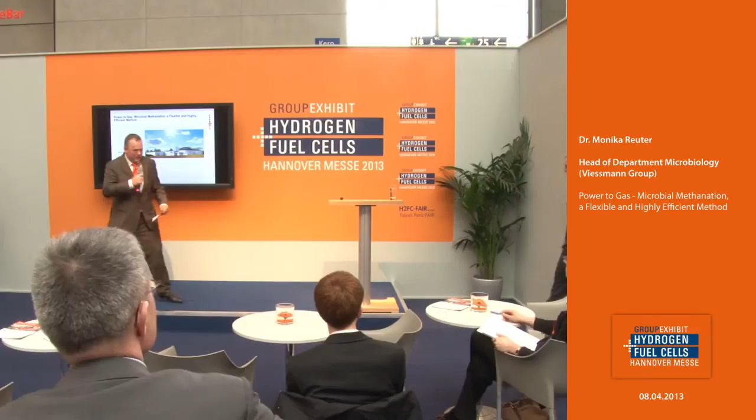Thank you very much for the kind introduction. Ladies and gentlemen, I'm very glad to give you some words on microbial methanation.

I want to structure my lecture in 5 topics. First of all, I want to introduce the Viessmann Group and MicrobEnergy, which is a subsidiary institute of Viessmann. A few words about biological methanization, the potentials, the development works and our results, what we have in the lab, and a few words about the economics.

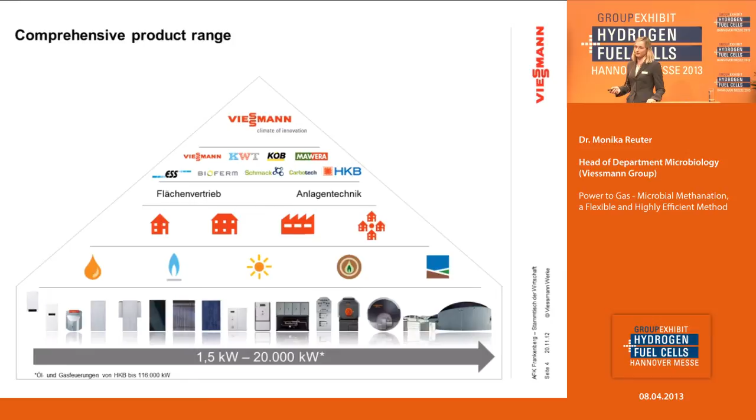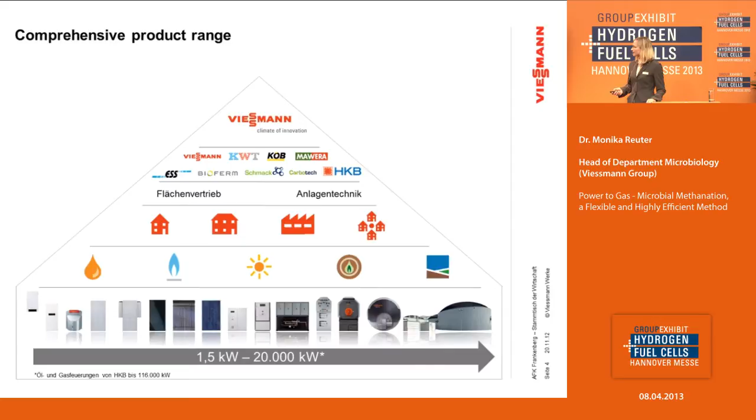MicrobEnergy is a spin-off company of Schmack Biogas. Formerly we were the R&D department of Schmack Biogas, and since 2012 we are now our own company. We have 16 people in Schwandorf. One portion of our work is dealing with optimizing the biogas process, and on the other hand is the power to gas process. So probably you know the biogas process.

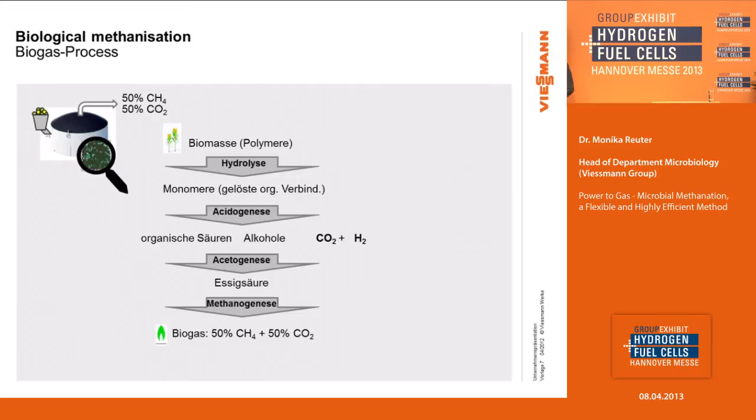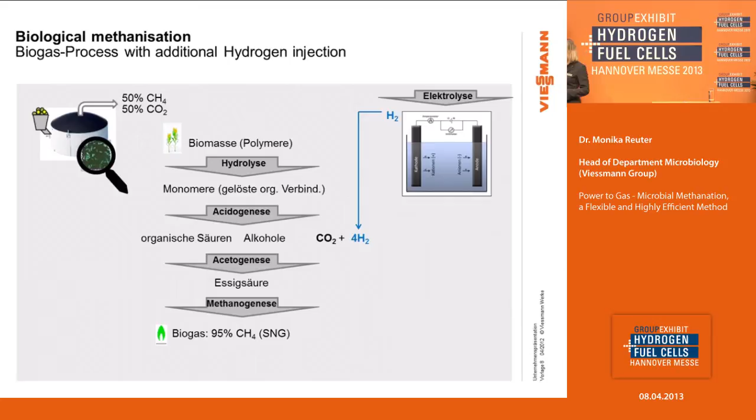It's divided in 4 steps: hydrolysis, acidogenesis, acetogenesis, and methanogenesis, so that's the normal process in the bioreactor. And we can see that we already have this process that we go from CO2 and H2 to methane. The biogas normally consists, when you use renewable energy crops, of 50% CH4 and 50% CO2. So the plan is to bring extra hydrogen into the biogas process and bring it up to the stoichiometric volume so that we have additional hydrogen to produce more CH4.

So the methanogenesis is a very old and simple process. The bacteria, or let's say archaea, it's not bacteria, it's a process which is very stable and very easy to control. So the bacteria depend on the hydrogen and the CO2, and if they have the gases, they do the work, and if they don't have the gases, they can't work, they sleep more or less. And we have an efficiency factor of about 80%, that's the conversion rate we have in the chemical process.

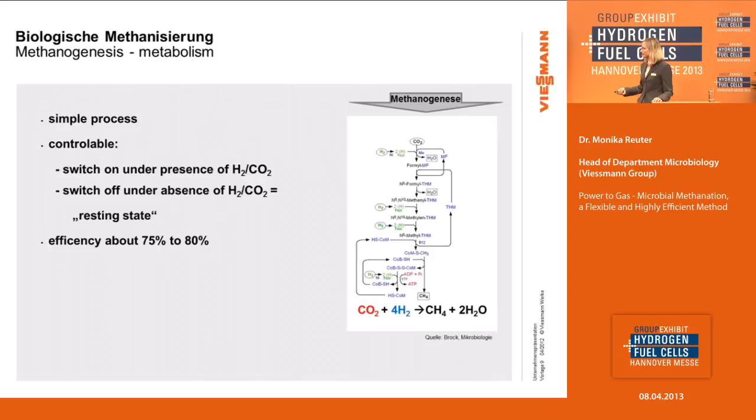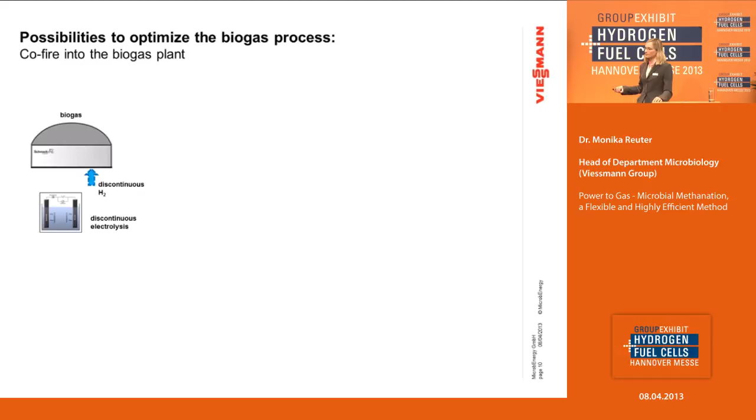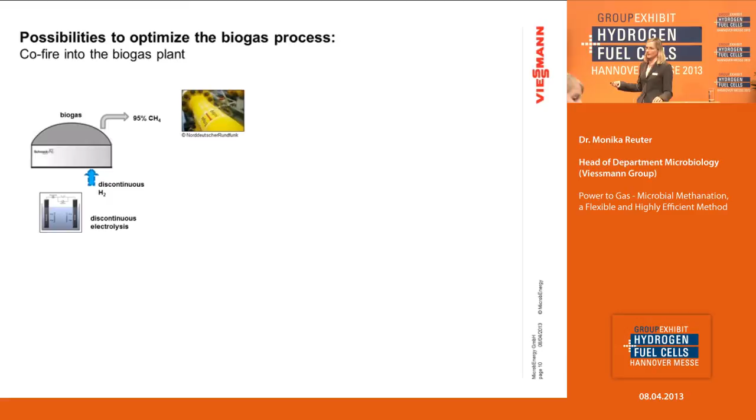Possibilities to optimize the biogas process: we have several opportunities where we can put the hydrogen into the process. It can be done into the process directly, either discontinuously. Then we can produce more or less methane, or SNG, which is possible to be put into the grid. So we can use the gas grid as an energetic reservoir.

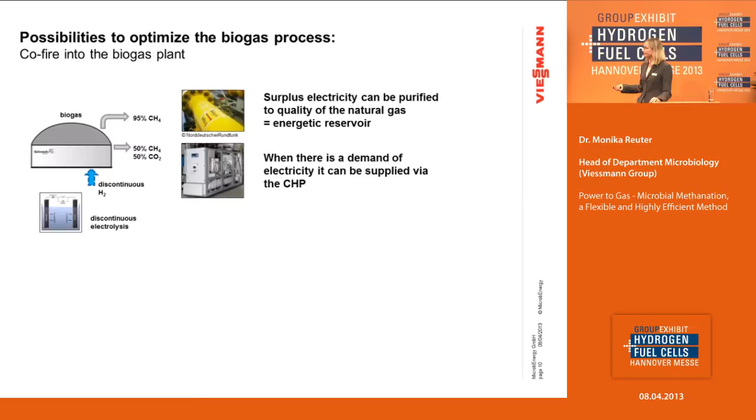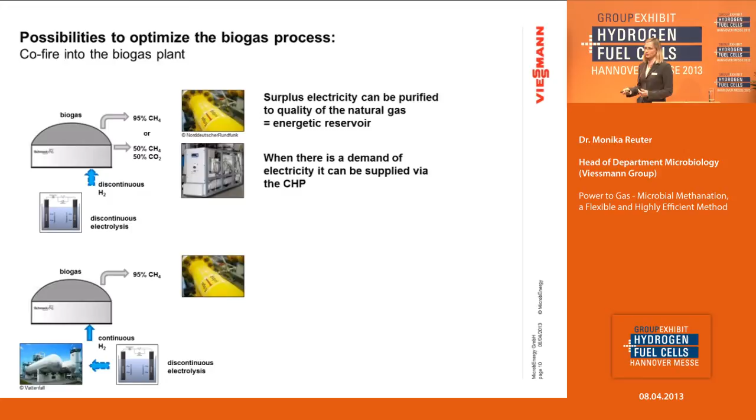But on the other hand, if we don't have excess power in the grid, we can use the normal biogas with a CHP to be burned and produce power, electric power. What we could also do is save the hydrogen in an extra tank and make a continuous process to the biogas process. Then we can spare the upgrading unit and produce out of the biogas already SNG, which can be put into the grid.

Another possibility is again to produce hydrogen and store it in a tank and use it afterwards, after the biogas process, in an extra tank where we use only this specific microbiology and produce also again gas that could be put into the grid.

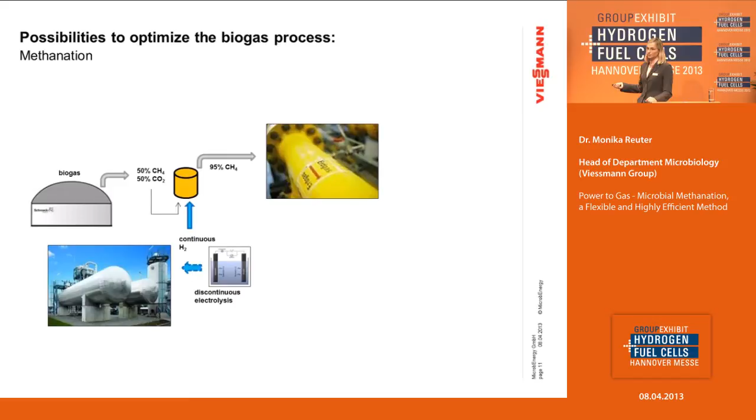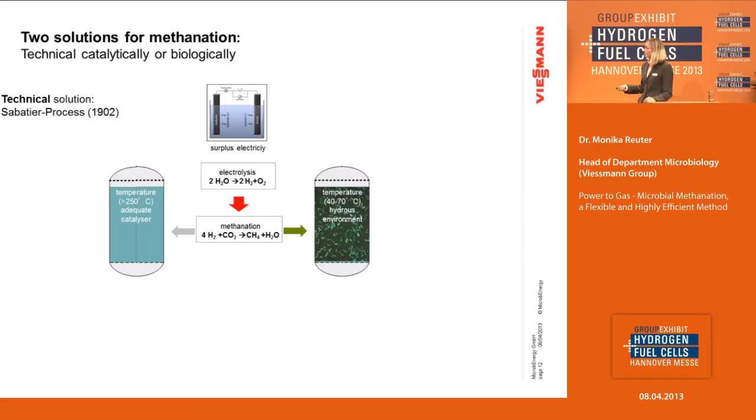So here we have a slide where we have the two processes vice versa. We have a technical solution, that's the Sabatier process. The patents are from 1902, so it's an old technology which already exists for a long time, and it's possible to do that. The pro is that it's quite good to be controlled, and it's more or less easy to scale up. There are experiences in lab scale, and it's more or less easy to bring it to technical or practical scales.

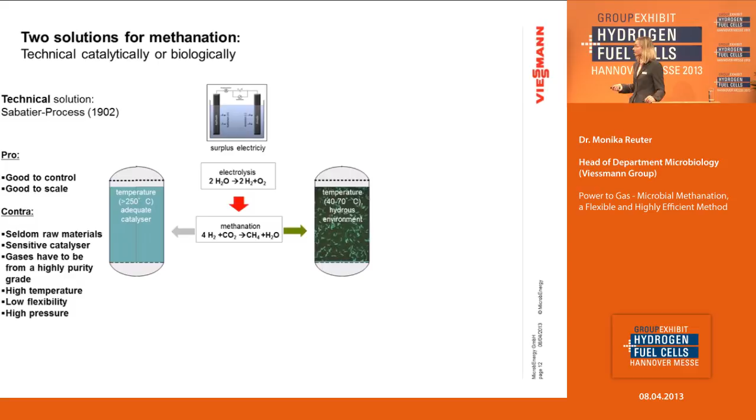The contra, or the negative points, is that the catalysts used in this technology are seldom raw materials, so it's depending on where you can find these catalysts, and it's very sensitive. So if you already have some oxygen in the hydrogen, then you have problems with this process. And of course it's a process that runs at more than 250 degrees and overpressure, 20-40 bar overpressure. So it's more or less not so easy to up- and downscale the process, also to switch on and off.

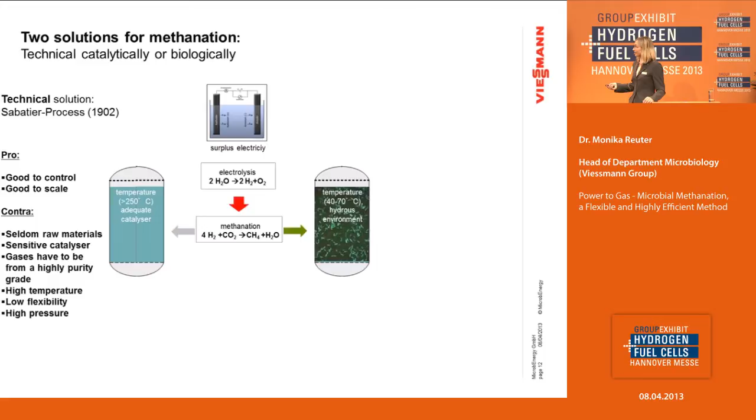On the other hand, the biological process, it's the methanogenesis, runs at temperatures 40 to 70 degrees. Okay, there are still some microbes that grow up to 100 degrees, but maybe we don't use them at the first step.

The pro is that we are at low temperature, low pressure, and the microbes are a bit tolerant, so they can handle traces of oxygen, where the Sabatier process already has problems. It's flexible, and we can use the periphery of a biogas plant, for example, or municipal waste water treatment. They already have this technology, and it can be easily put onto such a plant.

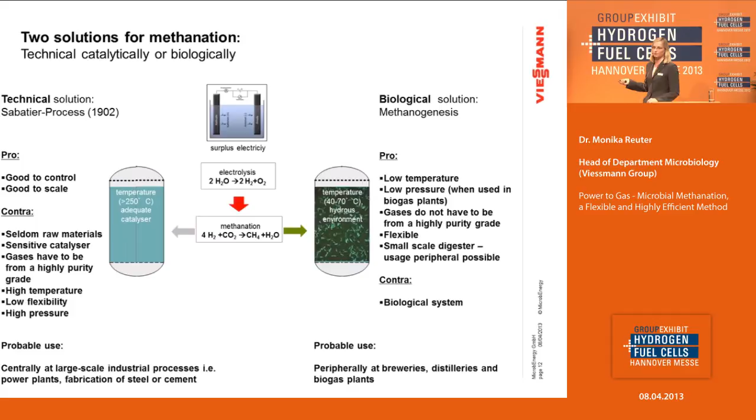But it's a biological system, you have to deal with the microbes. So we see the microbial one is small scale, so it's not for big infrastructure. It's more or less regionally situated, what we plan. In first steps we think we could use the biogas plants themselves, because we need the CO2.

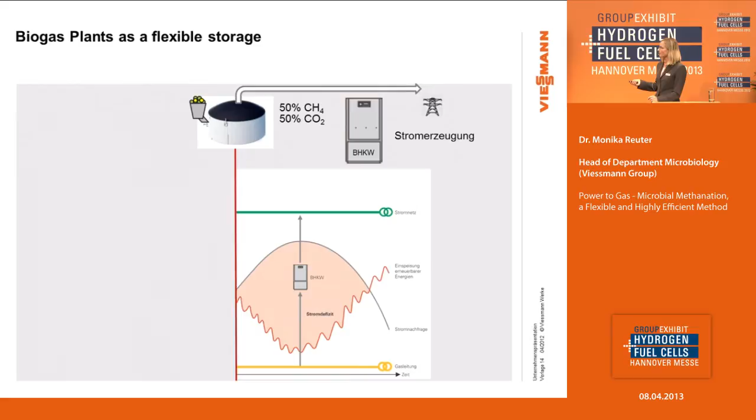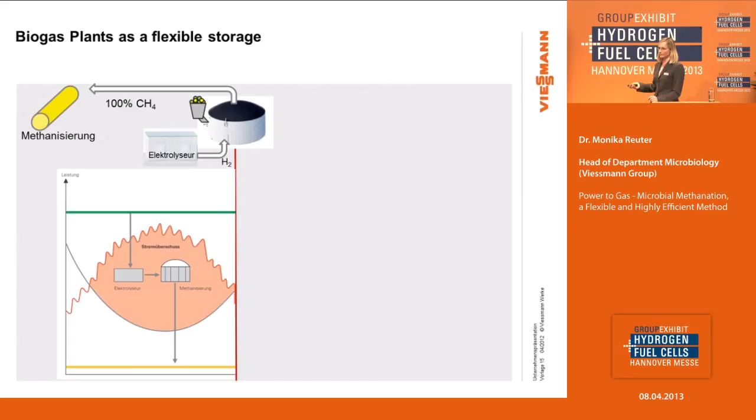The biogas plant, as I already mentioned, produces about 50% CH4 and CO2, and is used to produce electrical power. In times where there is a need for electrical power, the biogas plant can produce electrical power. And if there is too much energy, the biogas plant could produce methane and put it into the grid, working as a storage producer. So these are the two possible operating ways of a biogas plant.

Here's some data about the potential. We have about 7,500 biogas plants in Germany with 3 gigawatts. When we calculate with 7,400 hours, we produce about 22 terawatt hours, and we have a storage capacity on average of about 4 hours. So we have a storage capacity by now of 12 gigawatt hours.

If we can also manipulate the biogas production, because if we switch from a 24-hour driven biogas plant to an 8-hour or 16-hour driven biogas plant, where most of the biogas is produced in a certain window, we can already shift it by 9 gigawatts. And if we upgrade it with power to gas, we can shift it up to about 75 gigawatt hours. For this, we need electrolyzer power of 25 gigawatts.

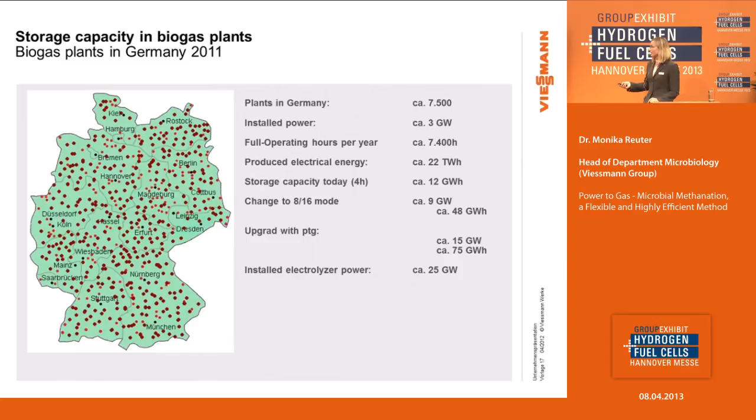Here are some results from the lab. Yeah, we shift the biogas. I think the design is a little bit wrong. We start with about 60% biogas methane content from the biogas, and we shift it up to 95% methane content.

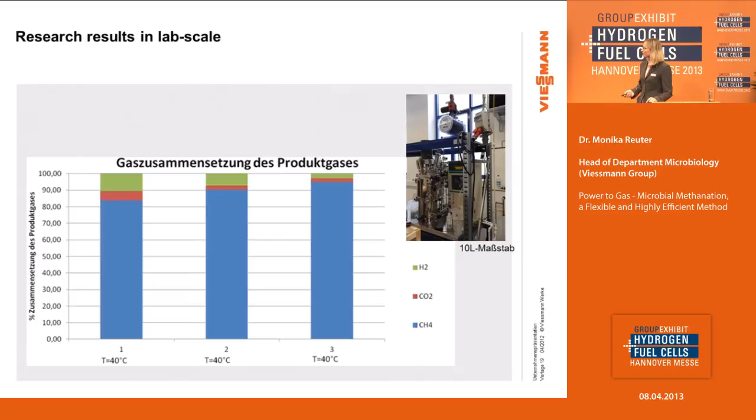We do it at lab scale, so here we have a 10-liter reactor. We are on the way to putting it into the first pilot plant. It's a 100 cubic meter plant below. Here we have an electrolyzer installed with 20 norm cubic meters per hour, where we can purify the biogas.

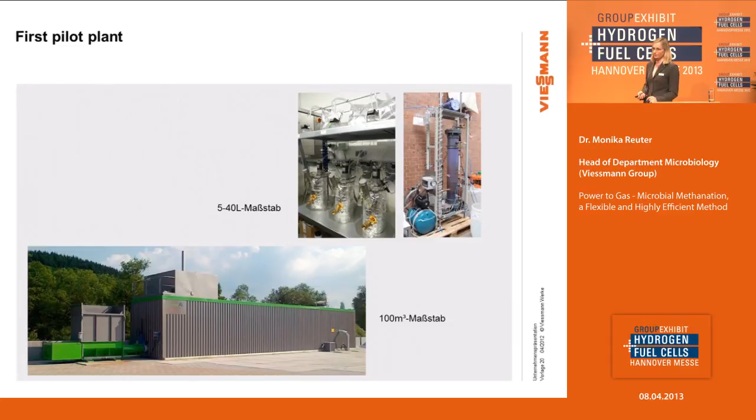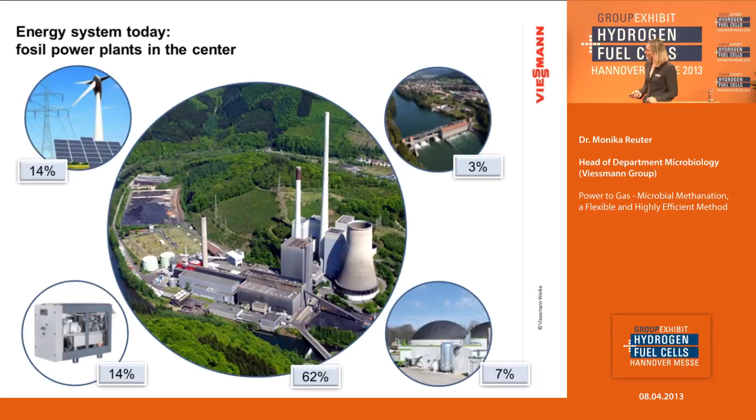Some words about the energy system today. This is the amount of energy from fossil power plants. We have 14% wind power, 3% hydropower, 7% biogas. And we will have a change in this regime because we want to switch off the nuclear power plants and bring wind power and photovoltaics more into focus.

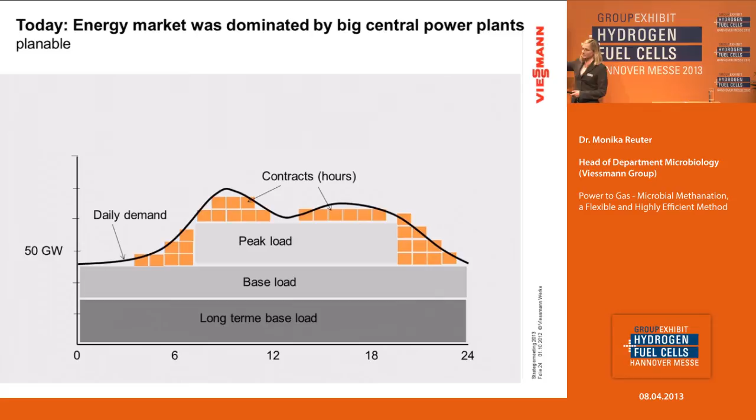We will need a lot more technologies like batteries to solve the problem of storing the excess power which is produced when the wind blows and the sun is shining but nobody needs the energy. We think this is the normal situation we have today, that the energy market is dominated by big central power plants. So we have a long-term base load, a peak load, and only in very upper cases do we have hourly contracts.

And we will see, if we have a lot of photovoltaic power or even wind power, when the wind is blowing or the sun is shining, we will have the problem of how to bring the PV power into the night. This is one solution with power to gas, that we can shift from daytime to night. And using the grids, the gas grid, we can also manage to bring the summer into the winter time.

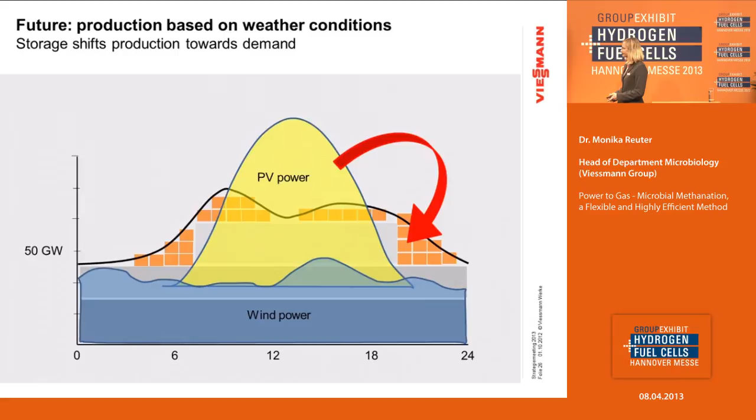A few words about the prices. We already have energy markets. There was an analysis from Regelleistung.net. We have yearly based costs of about 87,000 euros per megawatt per year.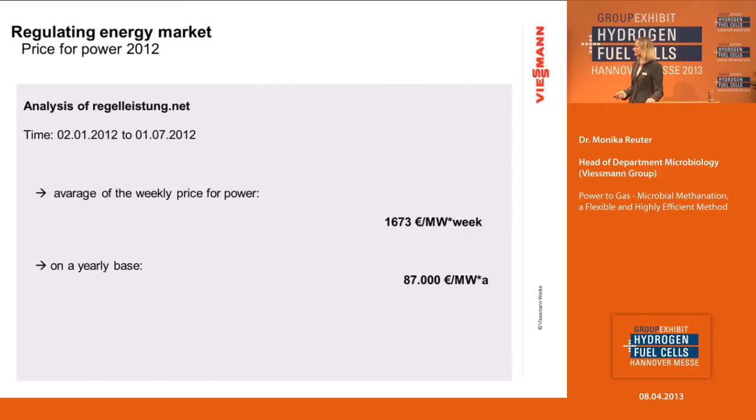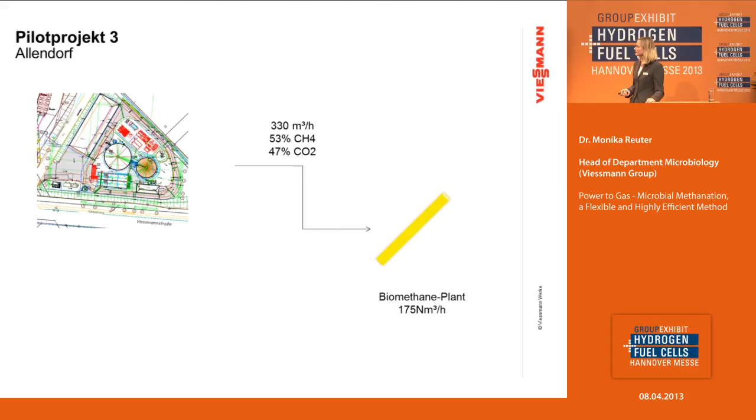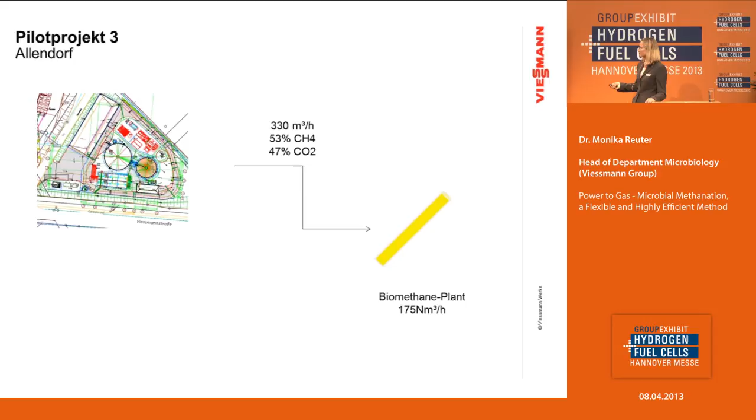Taking this for a pilot plant, what we plan in Allendorf next year, it's a biogas plant which produces 330 cubic meters per hour with a methane content of 53% methane. This biogas plant is a biomethane plant, so it puts it into the grid, 175 norm cubic meters per hour. Here we want to install a 120 cubic meter hydrogen electrolyzer and want to shift the methane content from 53% to 60%. This is a first demonstration that the system itself works.

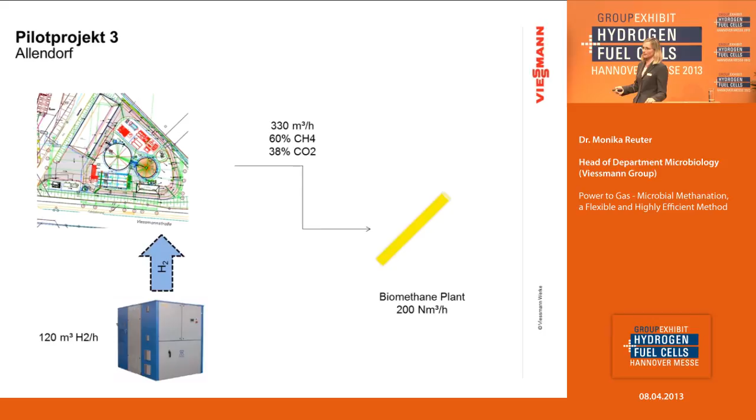When we take the data with the 87,000 euros per megawatt per year and the cost for energy was 1 cent per kilowatt hour, we think that we'll run the system about 2,000 hours per year, because it's not already there. But if we go further with the change in the energy system, we will have many hours in the year where we have too much power. So I think 2,000 hours per year could be an operating mode.

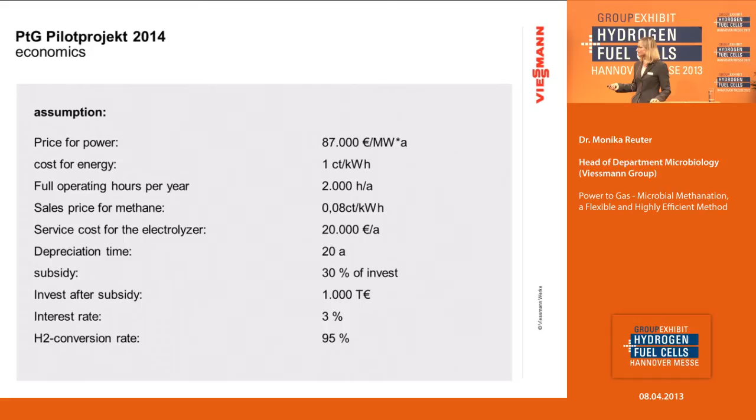This is the sales price for the methane, 0.08 cents per kilowatt hour. We have operational costs for the electrolyzer of about 20,000 euros per year. Depreciation time is 20 years, and we think we'll get a subsidy of 30%, so about 1,000 kilo euros per year, which is about 3%. We calculate with a conversion rate of 95%.

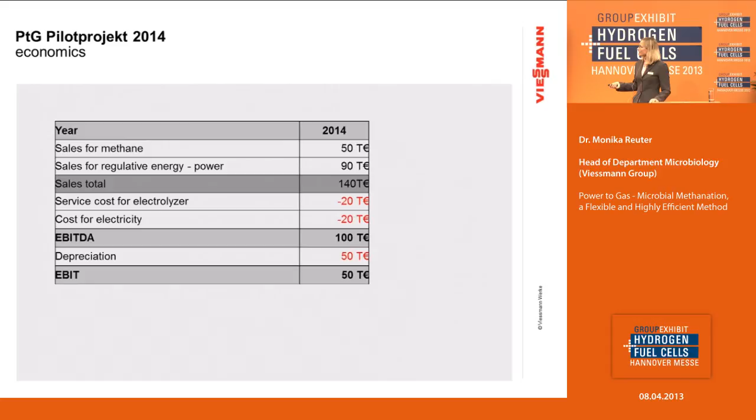Okay, that's all from my side. I thank you for your attention, and I'm open for questions if you like.